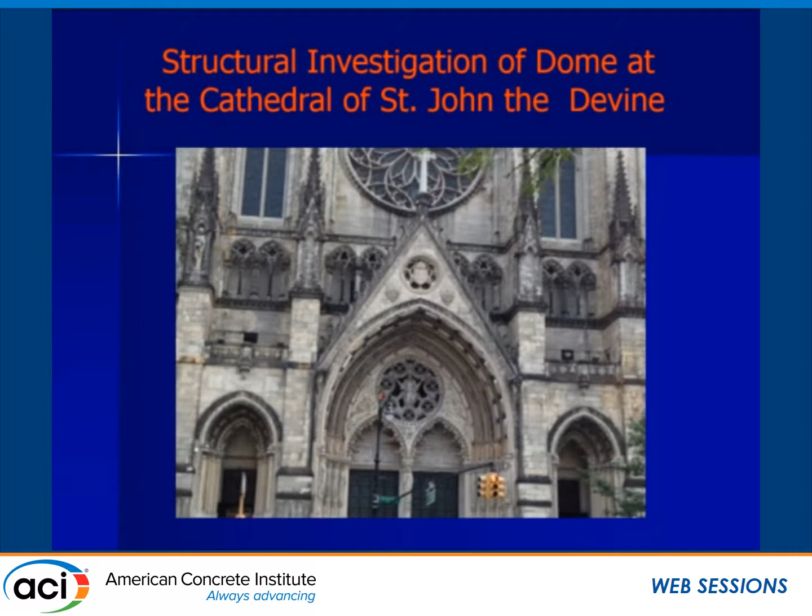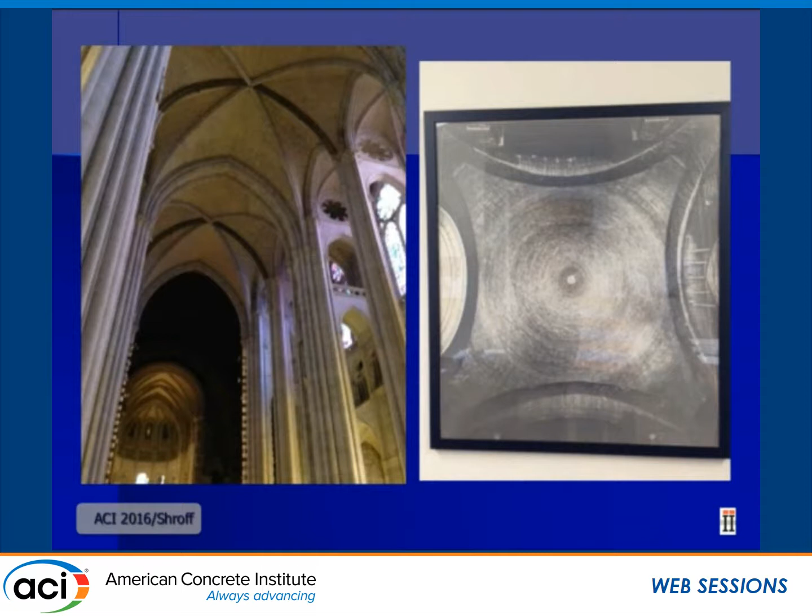And you can see the inside of the church. So that's the inside of the church, and the dome is right up there, way above, about 155 feet up. That's what the dome looks like.

The dome was designed and constructed by a Spanish architect engineer. His name was Guastavino, Rafael Guastavino. He and his son were involved, and they built, and you will see further up, oh my God, an amazing amount of structures.

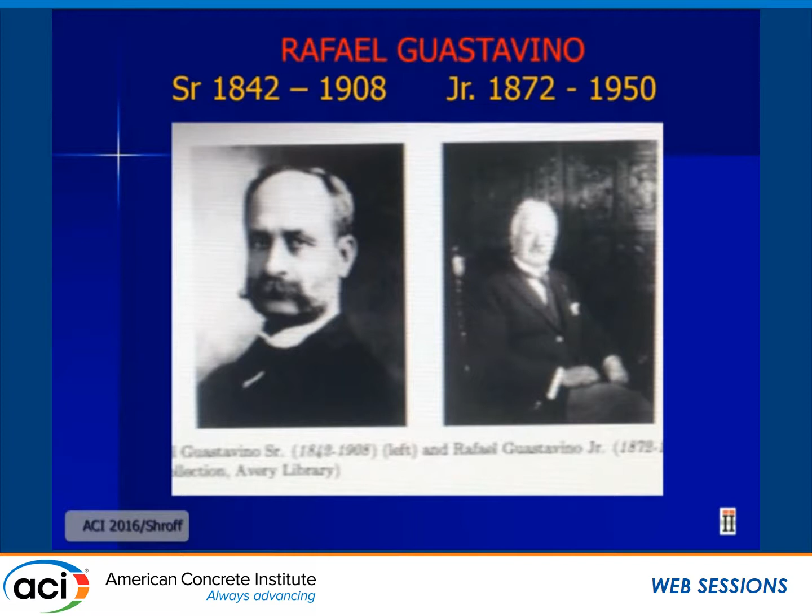The father went to university, became an architect and engineer in Barcelona. And interesting thing is that the same professor who would later teach Gaudi, I'm sure most of you have heard of Gaudi, who built a beautiful church and a lot of other stuff.

He moved to the US, the Guastavino team moved to the US in 1881. And his first major project was Boston Library. If you ever get a chance to see that library, the work that he did - he basically became a tile expert.

His first project, now his son had no education whatsoever - Guastavino Jr. His only education was the first project that he did with his dad, a 70-foot span tapered church dome in 1895 at the age of 23. The dome was 4 inches at the top, 6 inches at the bottom, and the span to thickness ratio of about 200.

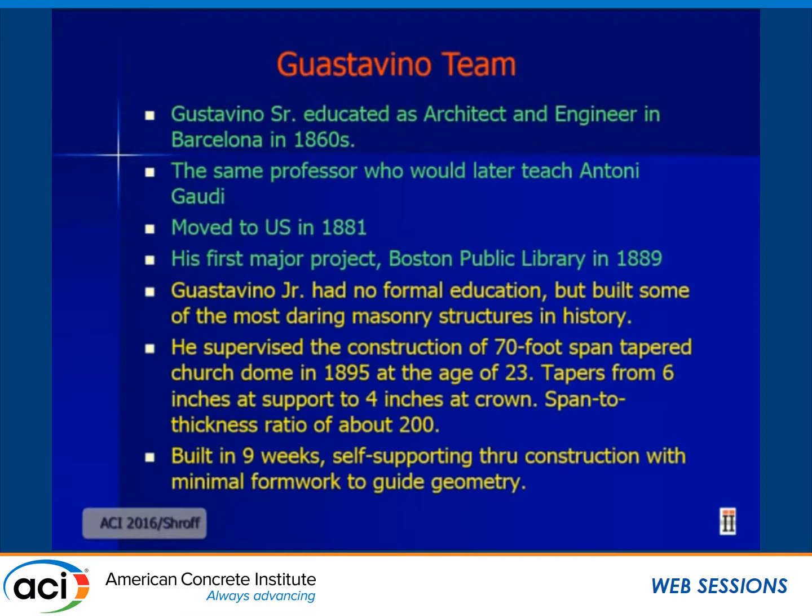The entire dome was built in 9 weeks without any formwork or supporting system whatsoever. What was his system? He created masonry shells. He used ceramic tiles, 6 by 12 by 1, and most of his structures were 4 inches thick at the top.

He built domes, shell type of structures. But shell theory was not that well known in those days, and he basically used a membrane theory approach in designing his structures.

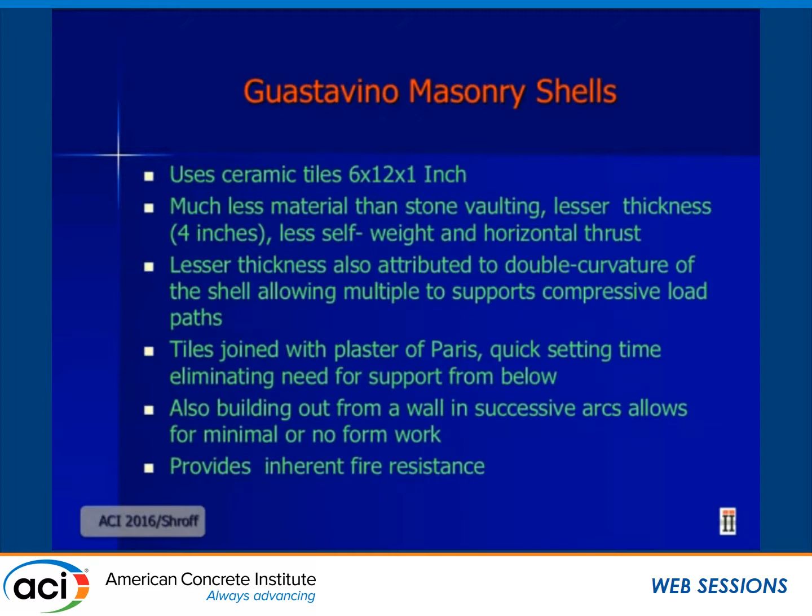The reason he could build from outside in, one row of tiles at a time, is because all he did was take these tiles and join them with mortar or plaster of Paris, which dries very quickly. He built one entire line around the wall, built the second one, then set on top of that one and built his second row on top of that. He also provided fire resistance because of the ceramic tiles.

Some of the structures he built: Riverside Church, St. Thomas Church, Church of the Heavenly Rest in New York, Boston Public Library, Grace University Church, Nebraska State Capitol, Smithsonian Museum in Washington D.C., and of course one also in Girard Trust Company building. So he did buildings, churches, auditoriums, all kinds of stuff.

The junior built over 600 projects without having an engineering degree, in 40 states of the United States. They are all functioning well and in excellent condition.

So let's look at this dome. This dome, Guastavino - the church was being built up there, the archdiocese were building the church. They ran out of money, not very unusual, I guess. And they went to Guastavino Jr. and said, we want to just build a temporary dome which will last 10 years, so that we can at least have the church completed.

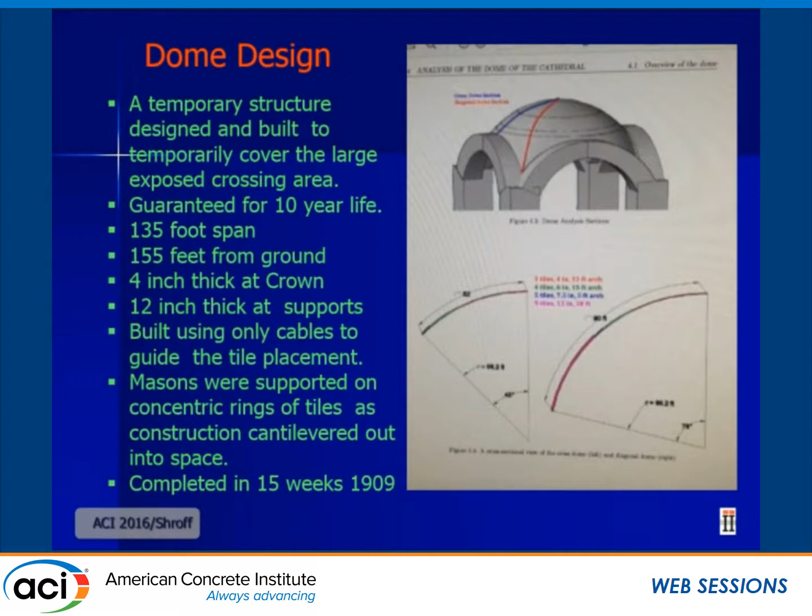This dome is 135 feet in span. This is the largest dome Guastavino Jr. ever built. It's 155 feet up in the air, 4 inches thick at the top, 12 inches at the supports. Built - he only used cables to work with the geometry of the dome. Otherwise, he had no other supporting system throughout the construction of the dome.

And it took 15 weeks. It took exactly 15 weeks. He had a contract to finish the dome by July 1st.

Now, one of the things in rehabilitation or in this kind of innovative design is that if you want to work with the owner, you've got to start working. First, convince the owner of your innovation, and then start working with him from the very beginning, before he writes the contract for you to do the work. Because once he gives you the 35 or 100-page contract, you've already lost.

And it's very interesting when we go ahead and see this. This is the original drawing that I used to actually do my analysis, which comes up later on.

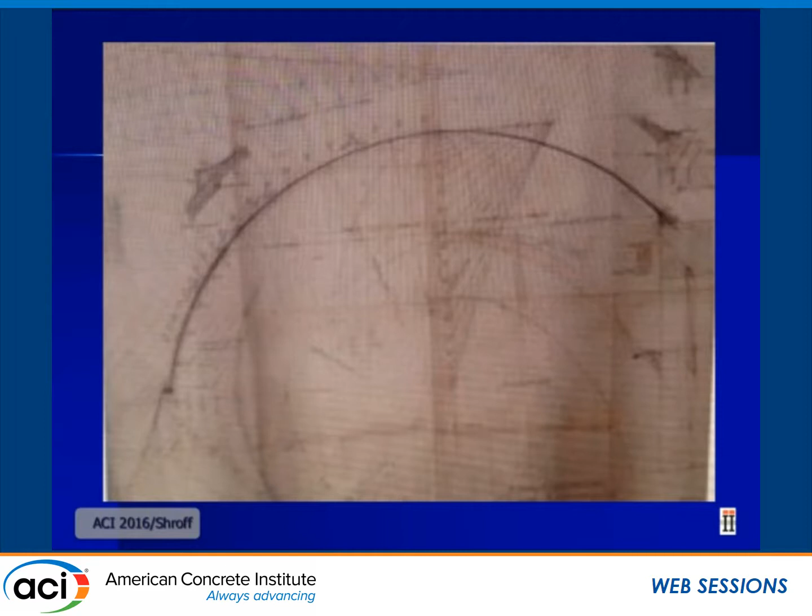He also understood that basically his design was based upon compression. He was going to make these domes, and from the design he found out that he obviously cannot take tension through these tiles. This is even worse than concrete, because you have so many separate pieces of tile that you're working with. So basically his concept was to make sure there is no tension in the dome. The only place he would put reinforcing was near the ends. In this case, at the 4 corners, he had put in some reinforcing.

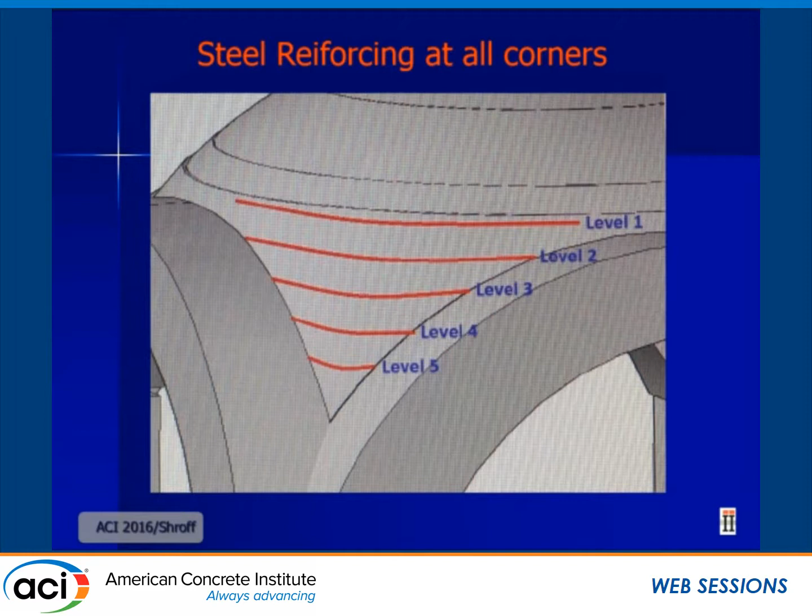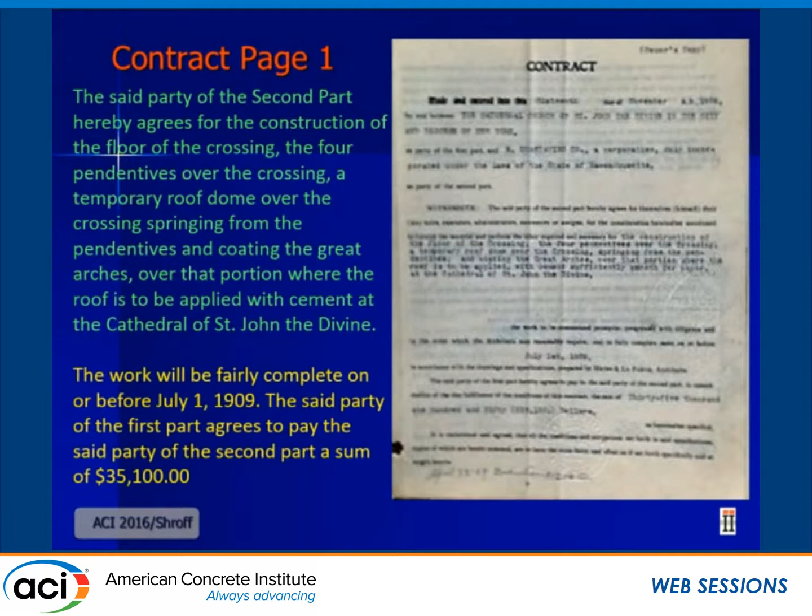One, what he's going to do: he said he's going to construct the floor, the 4 pendentives over the crossing, a temporary roof dome over the crossing, and provide some finish to the arches in case he causes any disturbance to the arches. He was going to finish this on July 1st, 1909, and he was getting paid $35,100 for this entire construction.

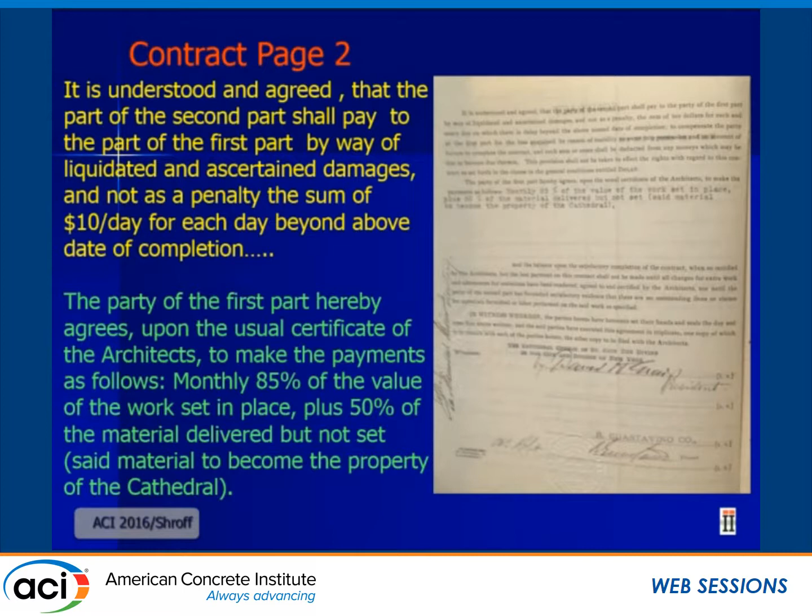And then the payment item. The payment said to make payments as follows: monthly, 85% of the value of the work set in place, plus 50% of the material delivered but not set, said material to become the property of the Cathedral. That's the entire contract for this work.

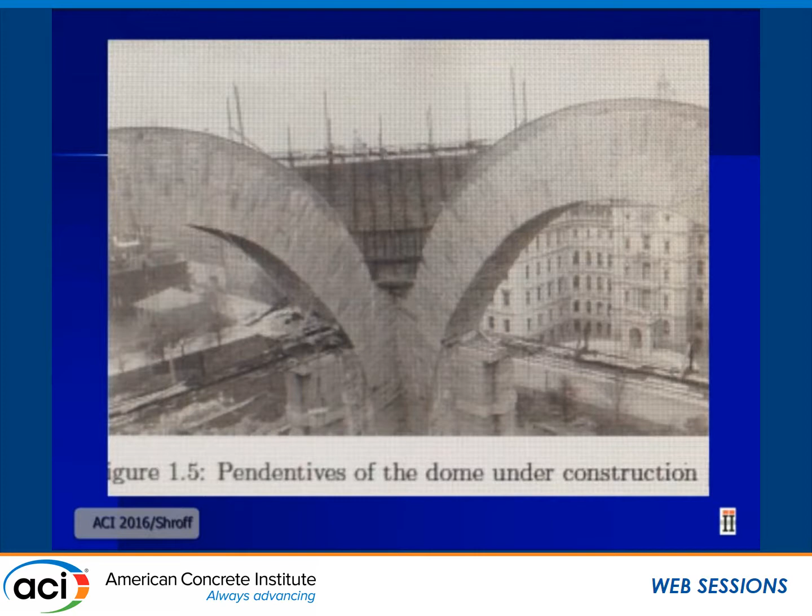There are some pictures of the construction. These are the main arches, the 4 arches, and this is the pendentive he is starting to build now. Here is the dome half completed, and if you look close enough, there's a guy sitting on top of the tiles.

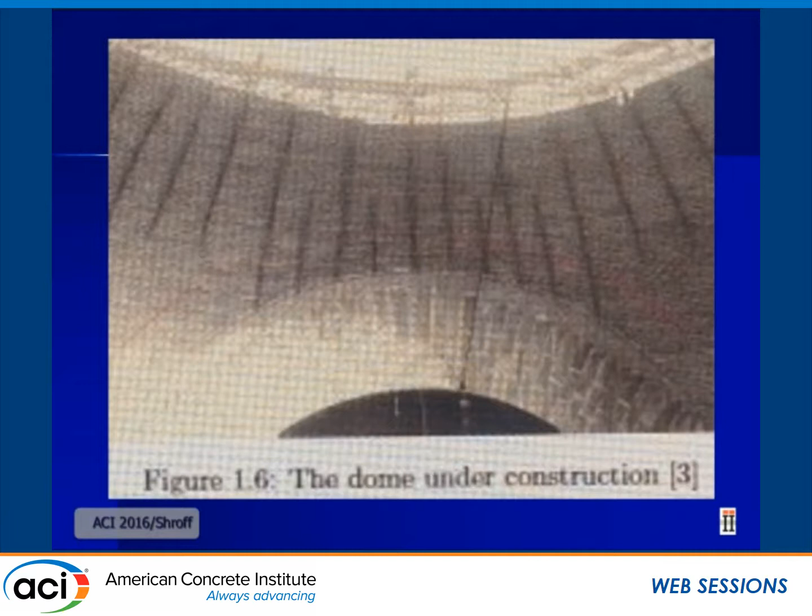Once again, this dome was built without any formwork, any shuttering, nothing. He built a layer of tile, one at a time, and the masons sat on top of the tile he just completed and built the next layer, and the next layer, and the next layer. And that's how the entire dome was completed.

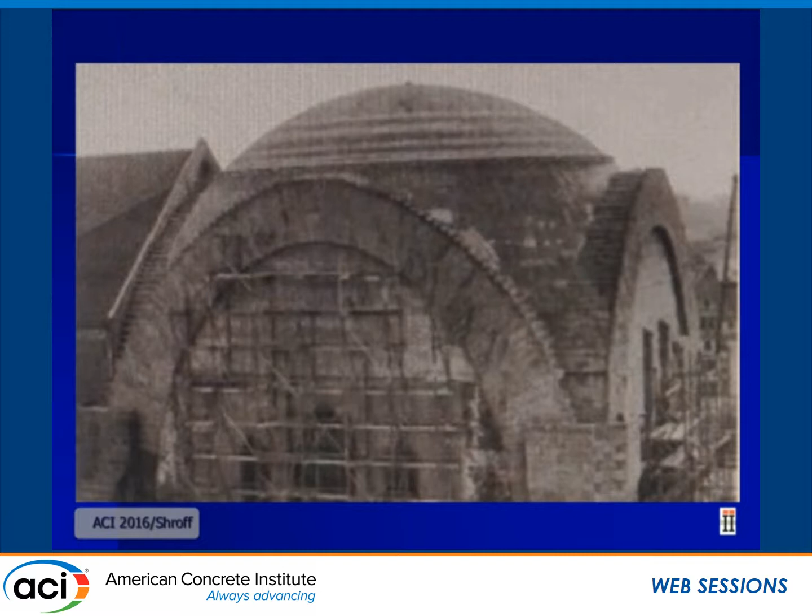Here is a more completed picture of the dome. Now the dome is fully finished. These are the pendentives, these are the arches. The reason they ran out of money is because this is the tower they were supposed to be building, but they didn't have the money, so they ended up with the dome that Guastavino built for them.

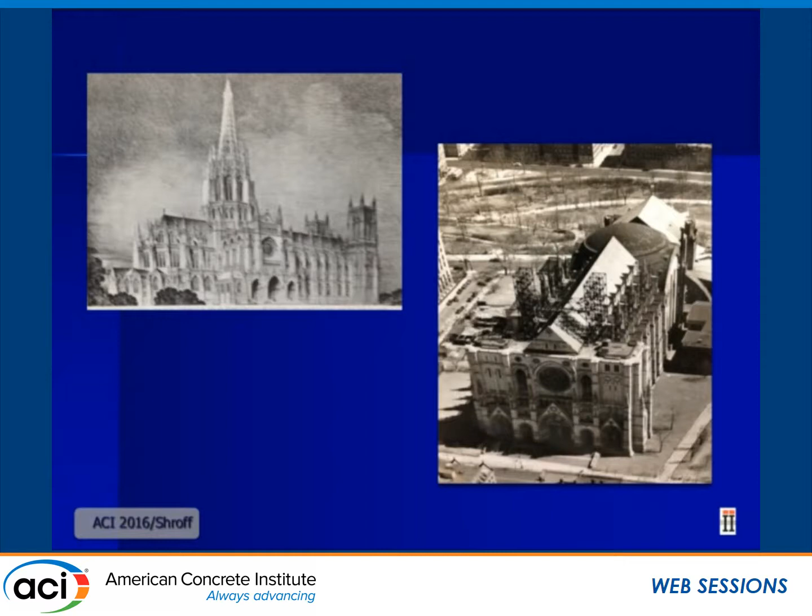In '69, we received a call from the Archdiocese that they wanted us to do the analysis of this structure because some pieces of tile and mortar were coming down on the floor. At that time I worked with Praeger Kavanagh Waterbury, which was retained to investigate the existing condition of the dome, evaluate its structural adequacy and integrity, and provide recommendations and repair procedures.

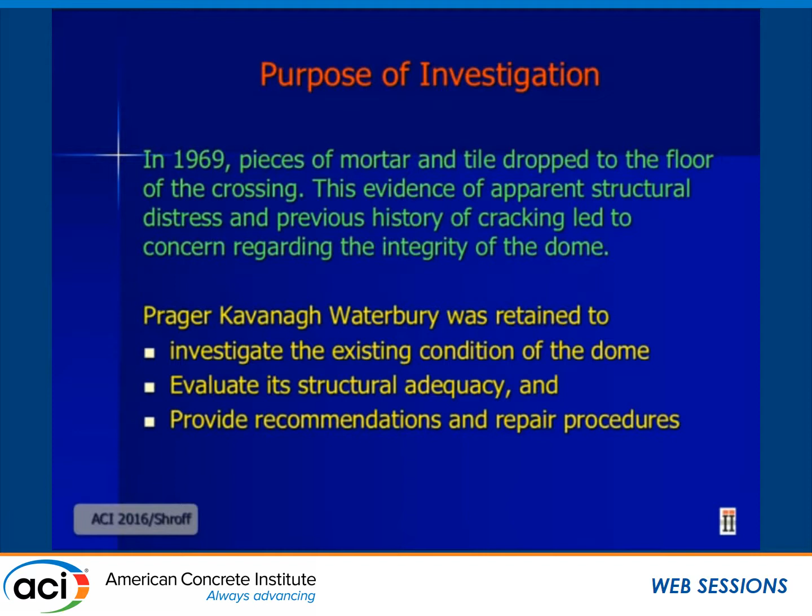So we went out there. First thing to do was a survey, and we found there were cracks. These 2 were the major cracks, and by this time you could even see these cracks from underneath. Basically these cracks started above, outside, and water leakage and everything else was taking place.

Other cracks were around the arches. All of these things were cracked. The dome was cracked right at these arches.

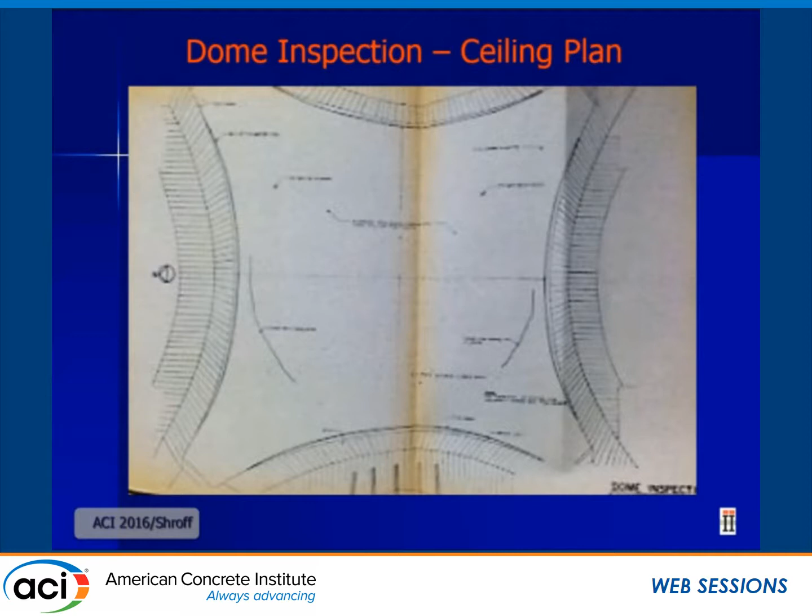While I went through and looked at the drawings, I went through the archives and the entire history of the dome's maintenance since construction. In 1917, the first cracks were already reported. Not too bad after 10 years of life—well, it was only 8 years—but in '37, repairs included the addition of a continuous ring.

Now this is where I think my dear friend Guastavino Jr. had cold feet. He really didn't have to put in this ring, but you'll see why this ring unfortunately became the culprit.

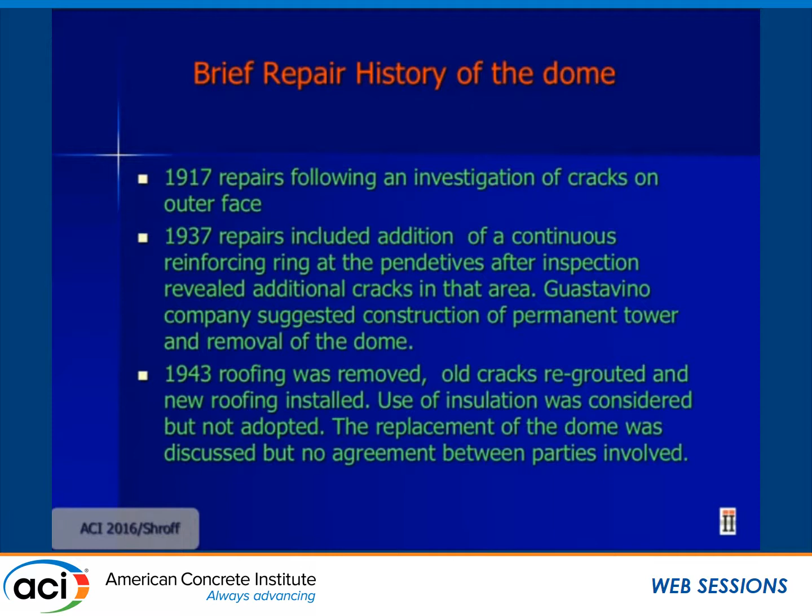In 1943, the roofing was removed, old cracks were regrouted, and new roofing was installed.

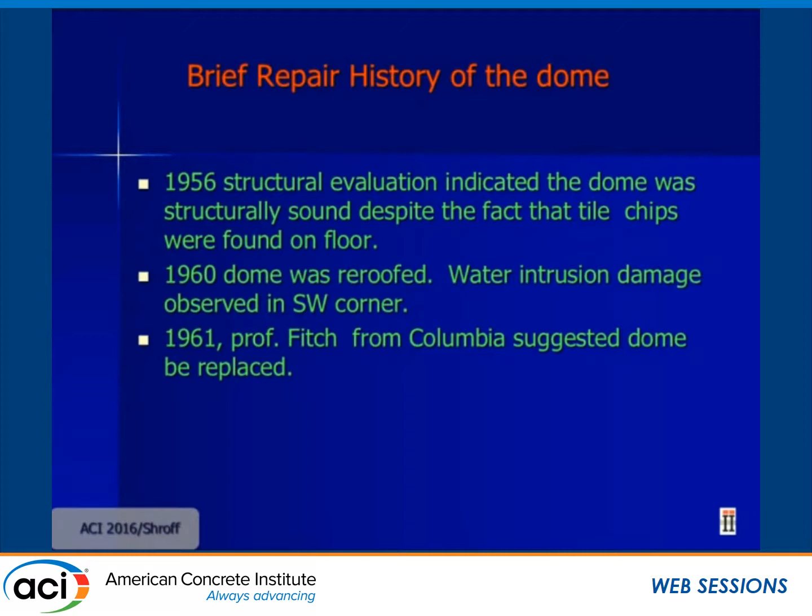Structural evaluation indicated the dome was structurally sound despite the fact that tiles were coming down on the floor. The dome was re-roofed, but water intrusion continued. Professor Fitch from Columbia suggested that this dome be taken down. Guastavino himself, when he put that ring around, even said that maybe this dome should be taken down.

So our job was now first to evaluate this dome. The loadings were really very simple: the basic loading was the static load plus the rise in temperature in the summer and the drop in temperature in winter. Inside the dome was heated, so the summer difference was about 30 degrees. Winter, the difference was larger because it could get down to 0 degrees outside. So you're looking at about a 70-degree temperature difference.

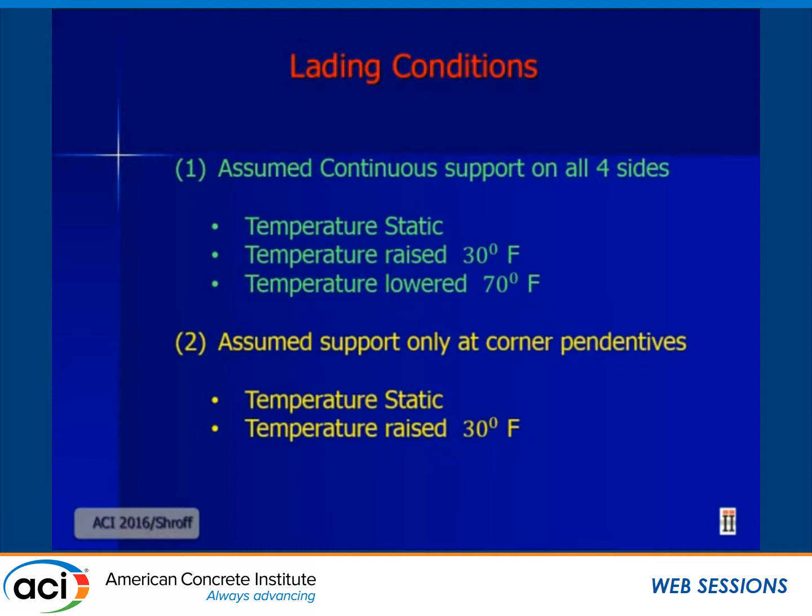So we started the analysis. The first analysis was where everything is supported - the arches are supporting the dome, plus the 4-point supports at the pendentives. We did the analysis and we didn't find any tension. Everything looked good. I don't know why it was developing cracks.

Because we had found that the cracks were all around the arches, one of the reasons for this crack was that the arches were very solid in inertia, while the dome was very flexible. So as the winter came and the dome started contracting, it separated from the arches.

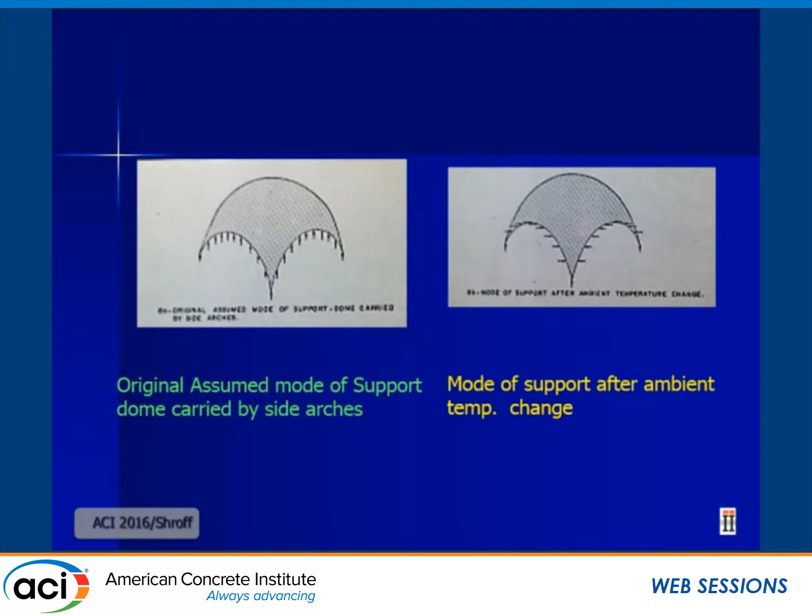So the second analysis was to assume support only at the 4 corners, and we applied the loads. Still no problem - everything was good, almost entirely in compression. We computed the meridian and hoop stresses at the top of the dome and at the bottom of the dome.

Then we started thinking, what is happening to this dome? We went out there, went up to look at the ring all the way to the top, and then I modeled the ring into my structure. And that was the culprit.

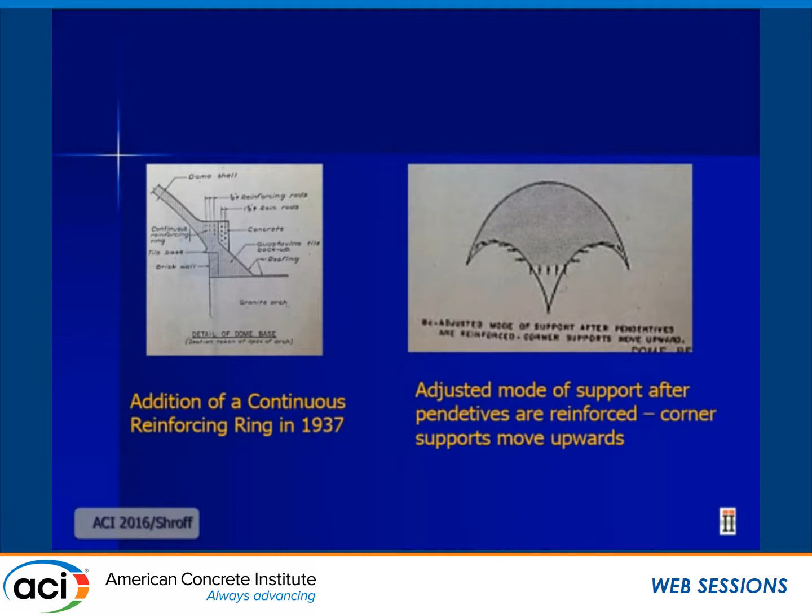Once we put the ring in, the support became a lot higher, and that's what created the tension and the tension cracks. So here are the stresses. These are the meridian stresses, and you can see this is all tension, with values ranging way above the modulus of rupture that we could compute for this composite material.

These are the tensile meridian stresses on the inside of the dome, and the value of these stresses were much smaller compared to the outside of the dome, where they were very large.

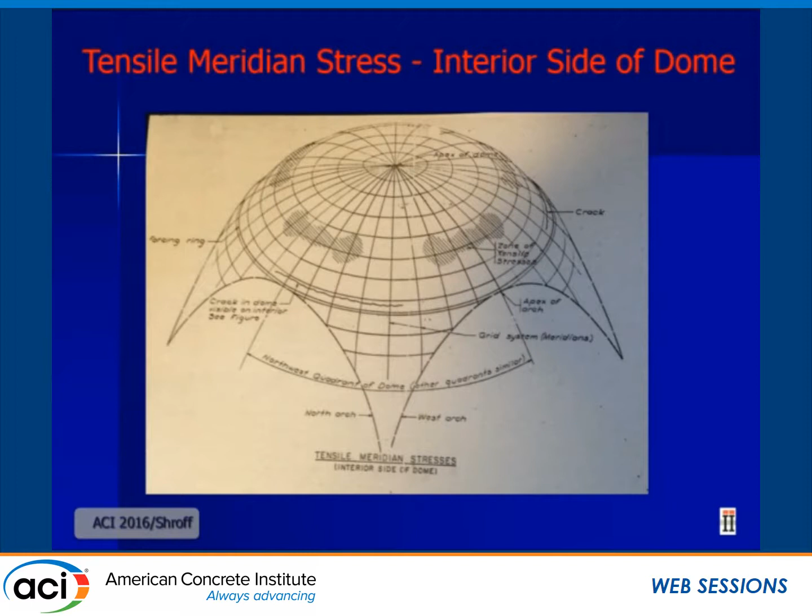Then there were the tensile hoop stresses. Now because there are tiles and layers, the hoop stresses we found were actually carried through friction through the various layers of tiles. So the hoop stresses were not really causing any significant problem with the structure.

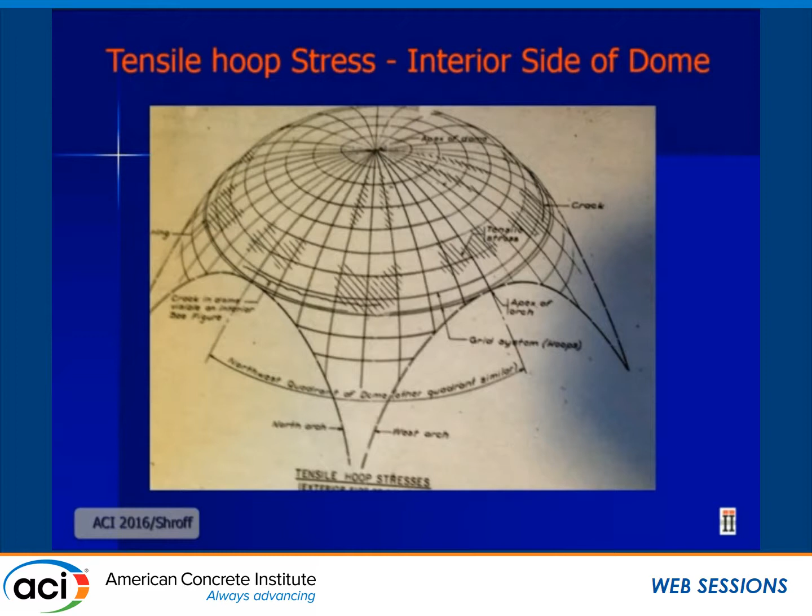These are the tensile hoop stresses on the inside of the dome, and these are the meridian stresses which actually caused the problem. The problem was basically in this area - everywhere else it was in compression.

So now we had analyzed this dome. The question was, what are we going to do? There was tremendous pressure to bring this dome down, and particularly Columbia professors saying it must be brought down created a lot more pressure on the engineering community. There were 3 or 4 other consultants, with 50-50 opinions. Major consultants were involved, but the consensus was to bring the dome down.

So we went in, had many meetings with the church and archdiocese, and said that we should keep this dome. The only problem with this dome was twofold. One, the temperature differential was causing the loading - so what if we reduce the temperature differential?

Very simple solution - what we came up with was to put styrofoam on the outside of the dome, thick styrofoam panels that don't add much weight, and then re-roof the dome above it.

The inside problem was pieces coming down, which could perhaps hurt somebody. So we came up with the idea of putting a metal netting inside the dome so that we would not have any pieces coming down.

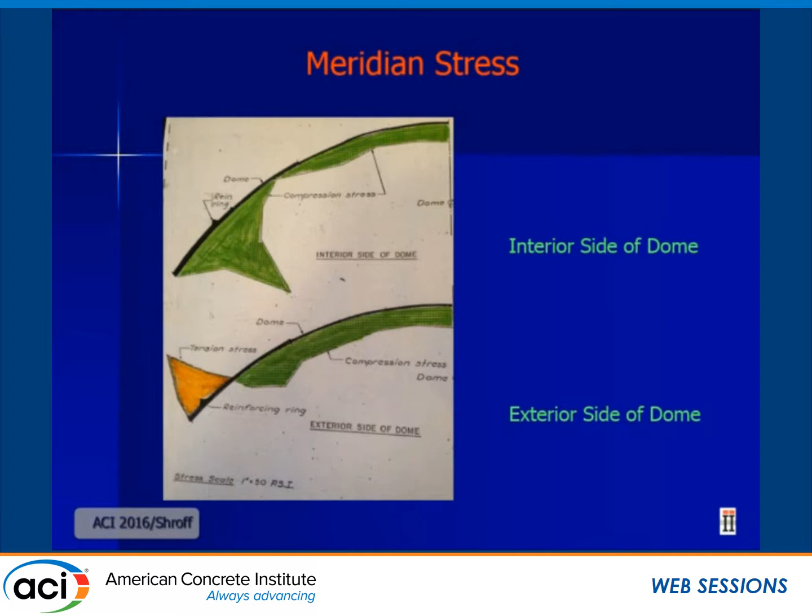So basically we introduced these sheets, or actually cubes - they were about 3 to 4 inches thick - and provided netting. We also did a lot of other repairs, grouting the cracks and other repairs that we had to do.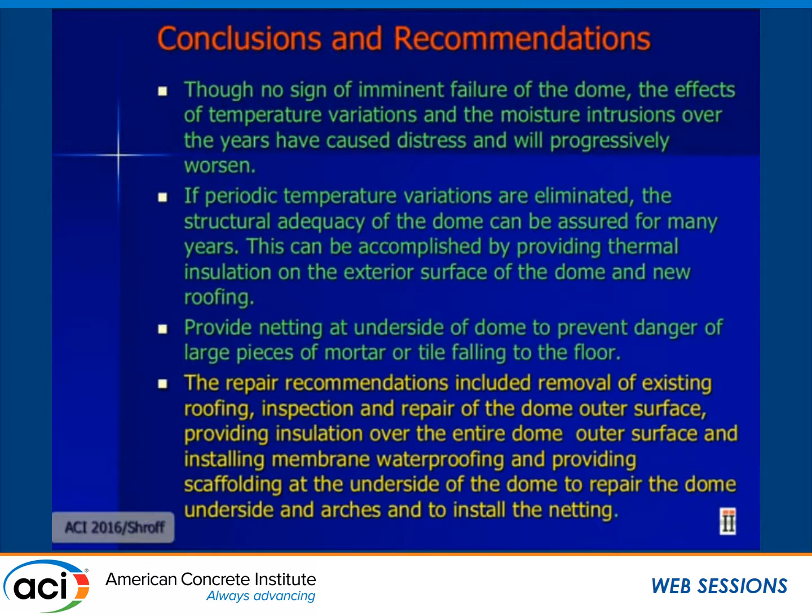So the lesson is, you've got to work with the owner. If you're going to do rehabilitation engineering, don't listen to the architects. If you're doing a private client, go directly to the owner. I have about 8 other projects - hopefully if I survive I'll present those to you. But it's very important to work directly with the owner, because if you don't, you are going to be sitting in that chair and somebody else is going to tell you, I would never do it that way.